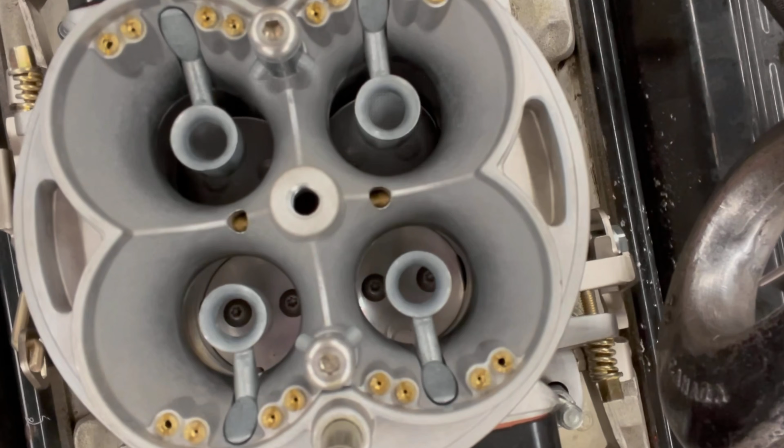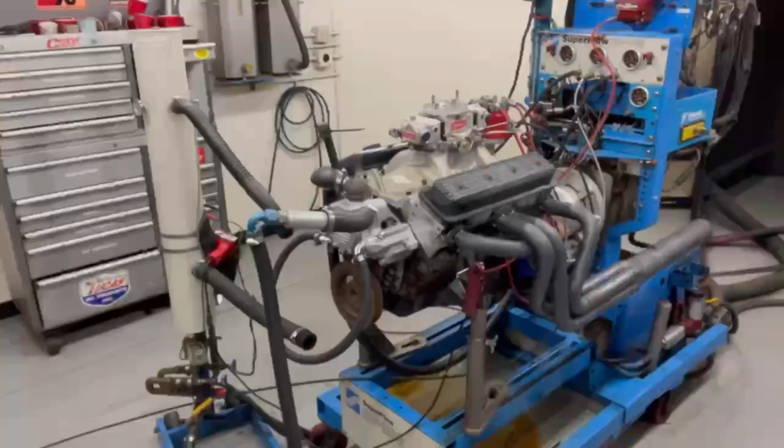Quick, let's see a show of hands. Who wants to see a dyno test of the other guy's small block Chevy? That's right, I'm talking about the Gen 2 LT1-350, the Forgotten Warrior. The guys at Westech Performance had one sitting around for, I don't know, maybe decades. So I decided, hey, you know what's a good idea? I should probably buy that motor even though we don't even know if it runs. So what happened? Did I waste my money, or is it the start of something great?

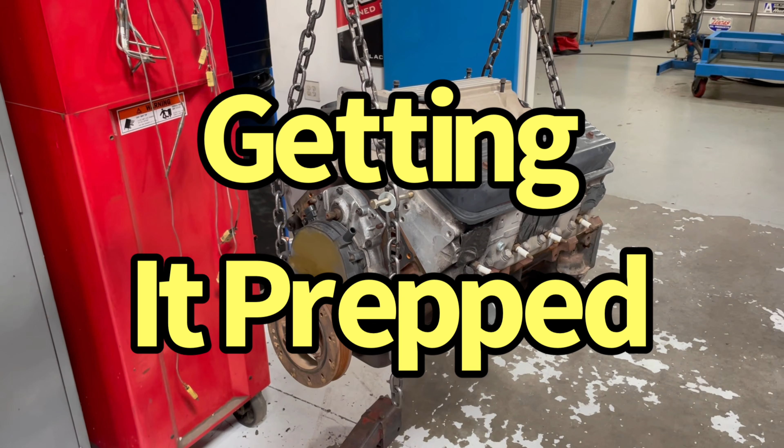Hello. Happy Spark. Yeah. It's up on the hoist. Now it's going right on there.

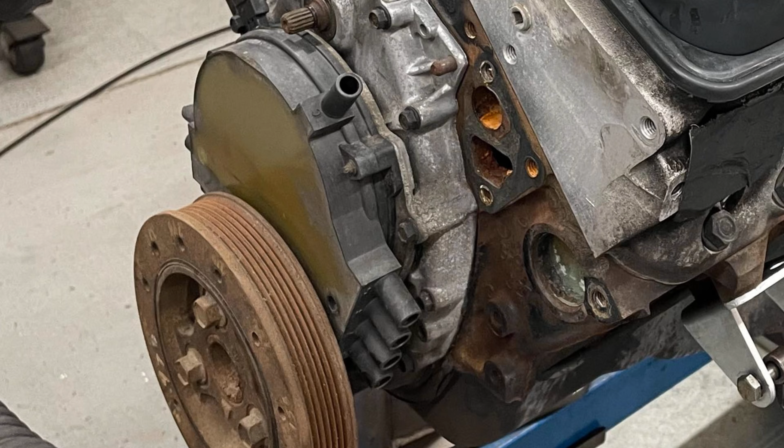Okay, because I can't run the factory LT1 intake manifold and the OptiSpark, and I don't have a way to change that around right now, I do have a manifold that I've drilled the hole in, so we might try that later on. But the easy method is just going to be put on a carbureted intake manifold. So we'll take this off, put a carbureted manifold on it, put a distributor in it, put a carburetor on it. I just want to fire it up and run it, make sure that it's okay.

And we can see how much power it makes. And then we have a good starting point, and then cam, ported heads, and then maybe some even wilder stuff. Let's pull the manifold. And we're out. Time to recharge. Got all the bars.

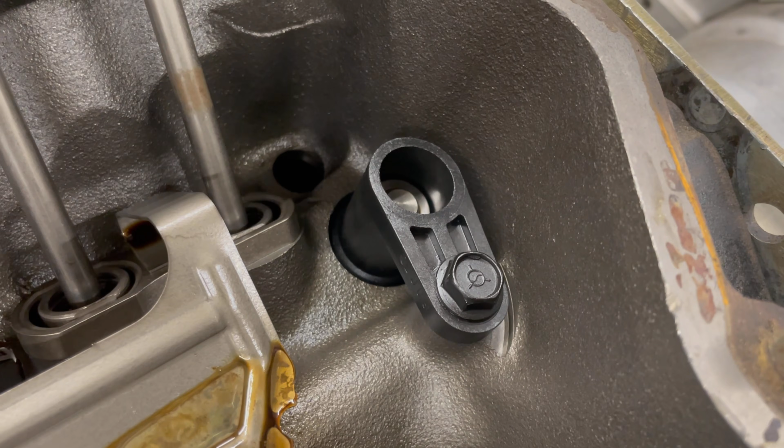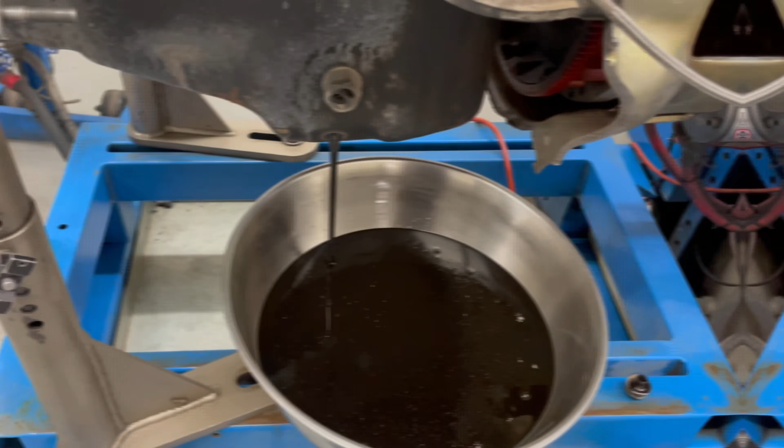So in order to run our distributor, we're gonna have to pull that out. That's the drive for the oil pump. And then put our carbureted intake manifold on. And then we can slide in the distributor. It all looks clean in there. That thing looks like fresh and new, man. Pretty fancy, huh? So we don't know how long it's been sitting really.

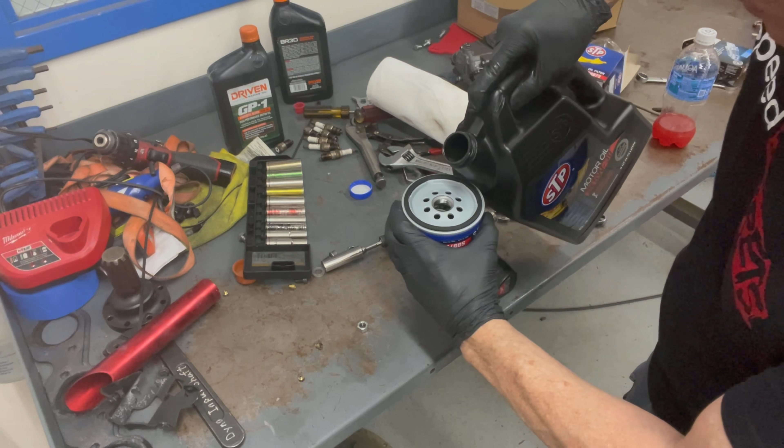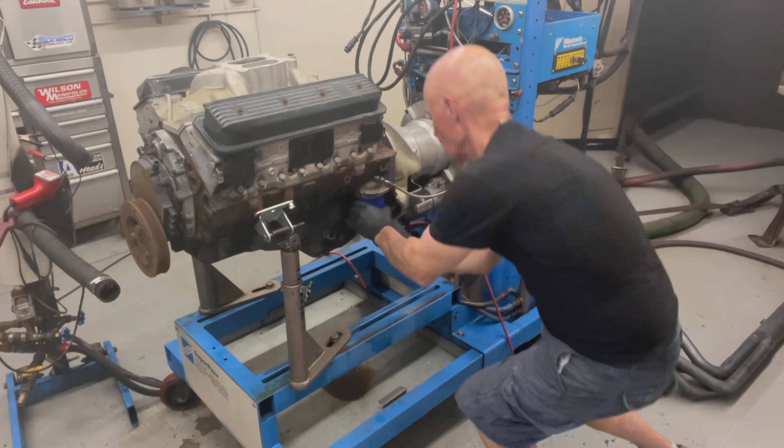We're gonna drain out all the old oil. Obviously put some fresh stuff in. Then we'll crank it over, look at our oil pressure gauge, kind of see how much oil pressure it has. Hopefully it's got oil pressure. Usually that's a good sign, and then it should run. Okay, we're gonna fill up our little bit of oil here in our filter. That's pretty good. We'll go on the seal here. So it's not permanent. We're ready to go. No intake on, this makes it easy.

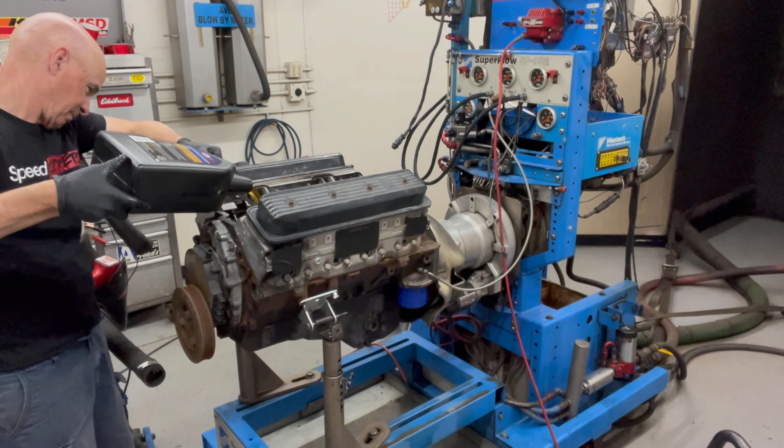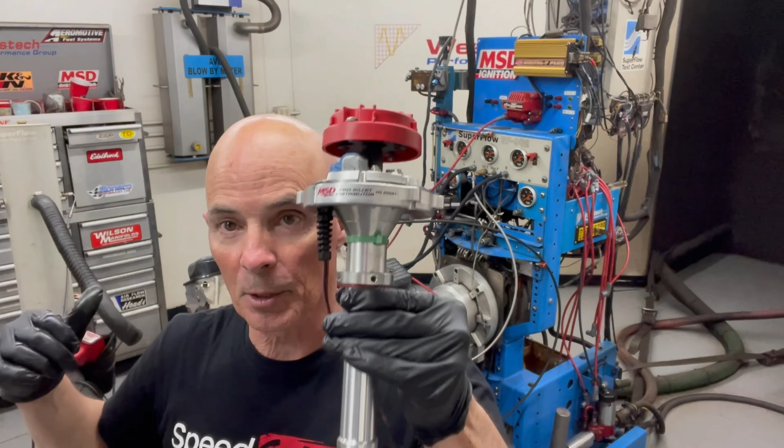Okay, we've installed that TDC. I'm gonna drop the distributor in, and then we can spin this thing over. Obviously, we need the distributor to drive the oil pump. So then we can spin it over, make sure we have oil pressure. We'll have fuel from the carburetor. We'll have spark from this. And if we have oil pressure, then hopefully we have ignition.

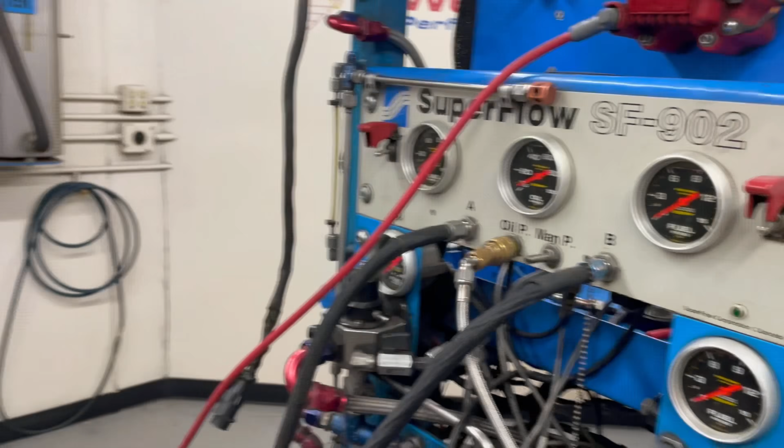Okay, now we got our distributor in. We can spin this around. We're driving the oil pump, and right here is where we want to look. Just make sure that we got oil pressure.

Okay guys, we got everything on, we got the headers installed, got the plugs in, distributor's hooked up. Got the coil hooked up, we got the carburetor hooked up, got the fuel lines to it. So what we'll do now is I think I have the timing fairly close. If it's at 10 or 20 or 30 or even 40 or whatever, it should certainly start. We've got fuel in it, so let's go in, fingers crossed, start it up for the first time.

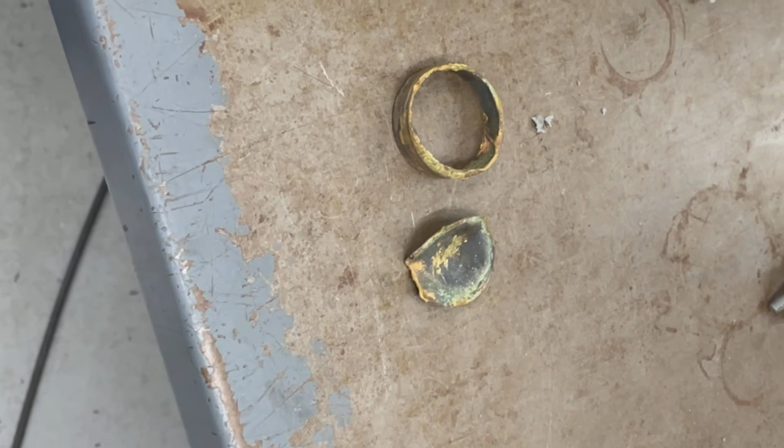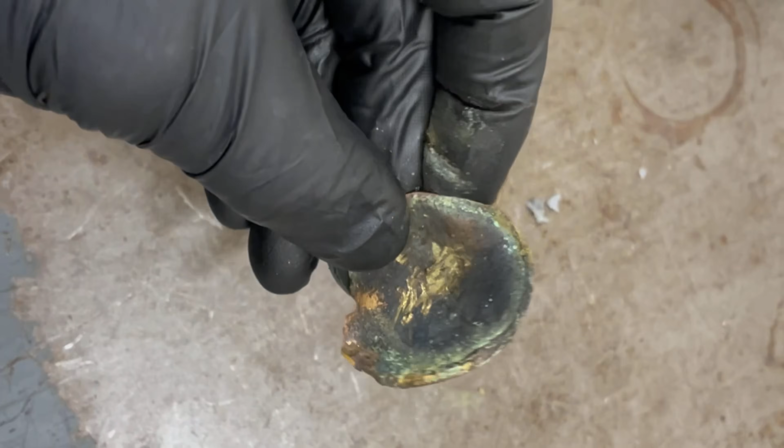Yeah, big power. Well, the dyno session wasn't without a little bit of excitement. After we put it on, tried to put water in it, we had a big leak from the back. That's because of this. No problem, I popped in a new one. And we're ready to go.

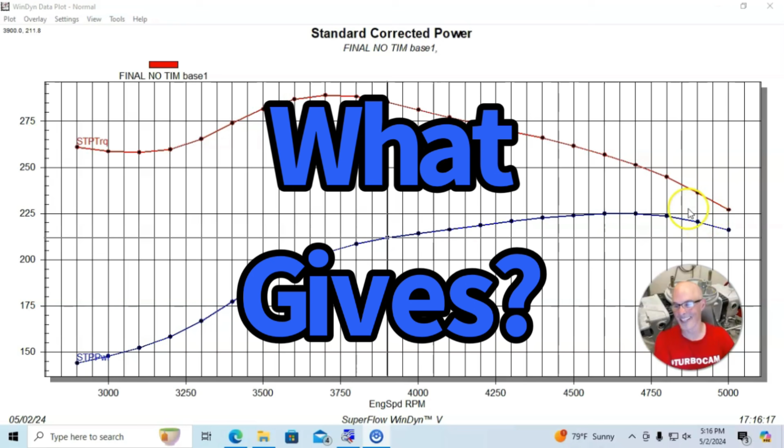Okay guys, you saw from the video we have our Gen 2 350 LT1, the other guy's small block, up on the dyno. And quite honestly, I was disappointed on this first run. We ran the thing with long tube headers, we had an MSD distributor, we had the dual plane GM 4-barrel intake manifold, and on the first runs we had a Holley Ultra XP 650, and it made a whopping 225 horsepower and 289 foot-pounds of torque.

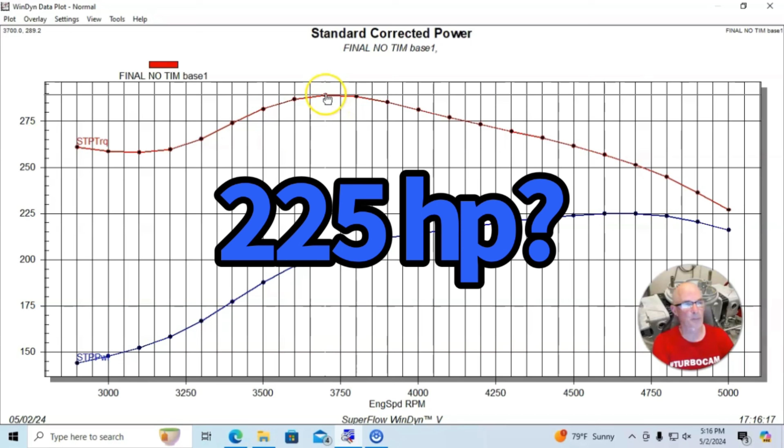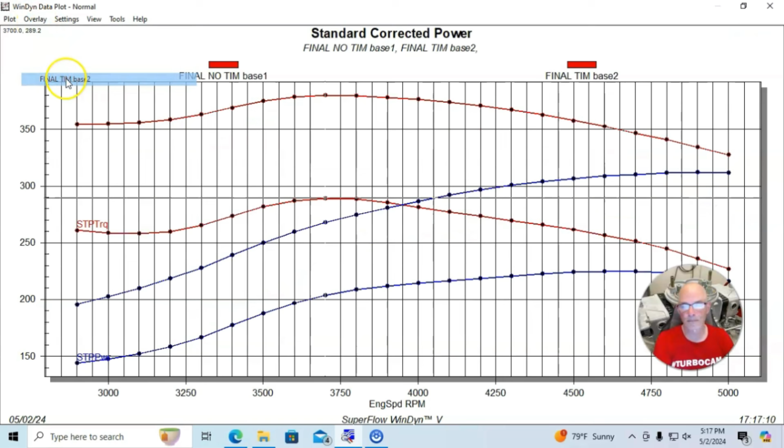We immediately figured out what was going on. I went in, the distributor was loose enough that it actually had rotated and had taken all the timing away. It's basically down to 0 timing. The timing was right at TDC. So here's what happened when we adjusted the timing. Now it started making power. Peak power was up to 312 horsepower. Peak torque was up to 380 foot-pounds, more realistic numbers. Things that we would expect from Gen 2 LT1.

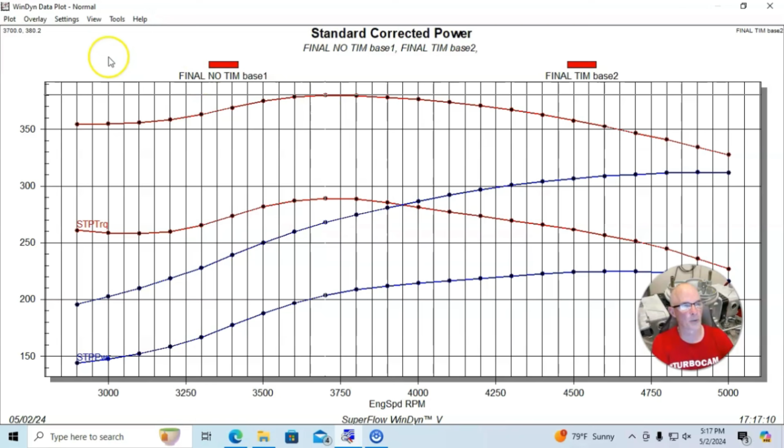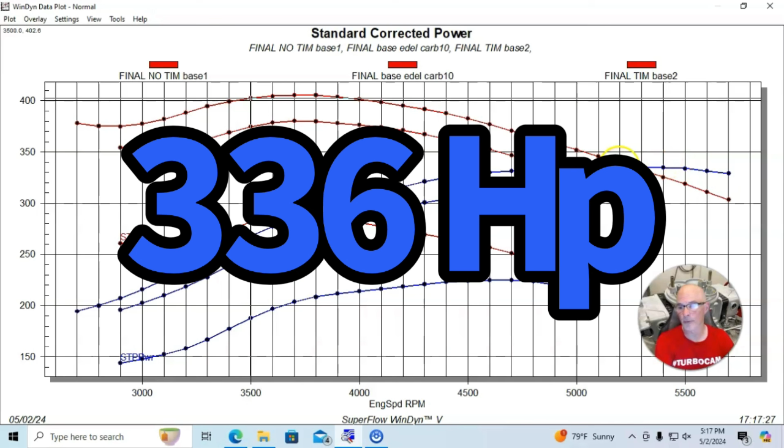And here is our optimized run. This is after we installed the Edelbrock AVS, the 650 carburetor, and then obviously we did tuning and jetting and stuff on this as well. So this basically is an optimized tune, and it made good power, made 336 horsepower. Peak torque checked in at 400 to 406 foot-pounds of torque. You can see it's a very good curve and almost exactly what we would expect from an LT1-350.

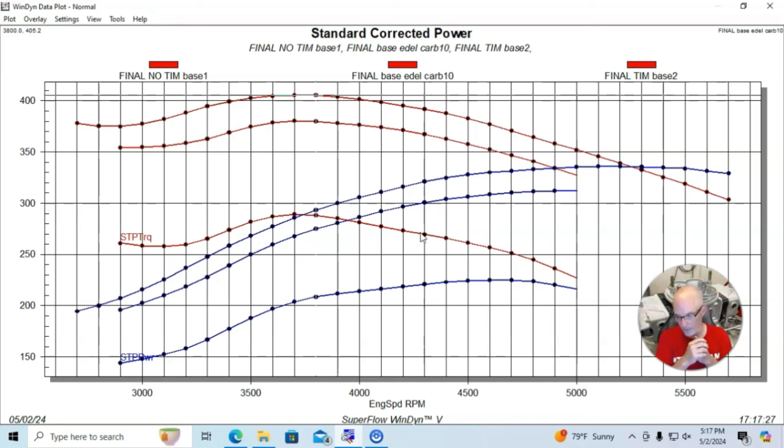But don't worry, this is just a starting point. Now it's time to make future mods. So I'm going to have more videos when I go back down to Westech. We're going to do camshafts and ported heads, and obviously, we have to run some boost.